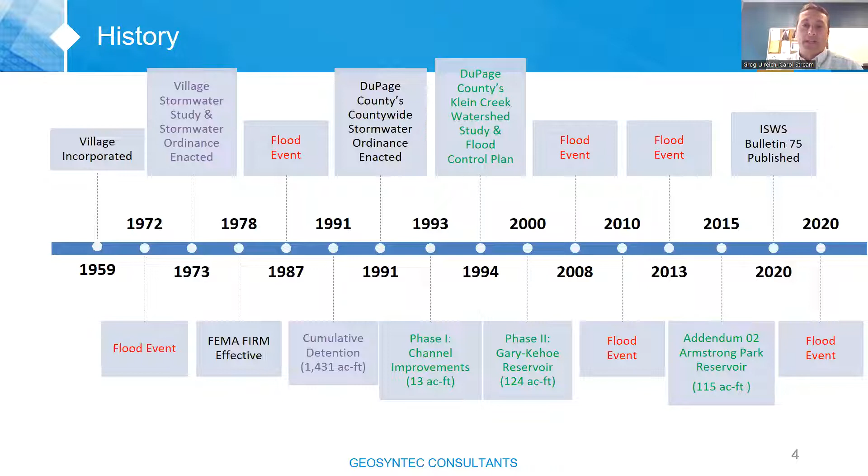And then this May 2020 event is just kind of that flood event there. That's not 100-year. We'll talk about what size that was for us.

So over on the right is the Klein Creek watershed. You've got Stratford Square Mall at the upstream end, that's in Bloomingdale, and then you cross over Army Trail Road, and most of this is Carol Stream, with a little bit of Glendale Heights to the right. So that boxed area is what I have on the screen to the left, and everything is flowing from right to left, with the main stem on the left-hand end.

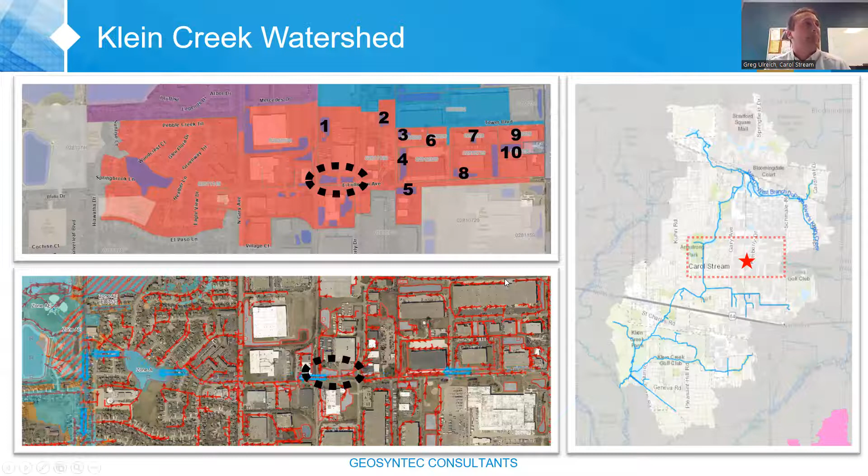The circle is those detention basins as part of the Kimberly North subdivision, which is what we are talking about. When that subdivision was developed, everything upstream of it was pretty much agricultural. Over the years that developed, and we have as many as 10 stormwater management facilities upstream and tributary to these 2 detention basins. So you would think that would help, and that we wouldn't be seeing the issues we see today, but obviously that's not the case.

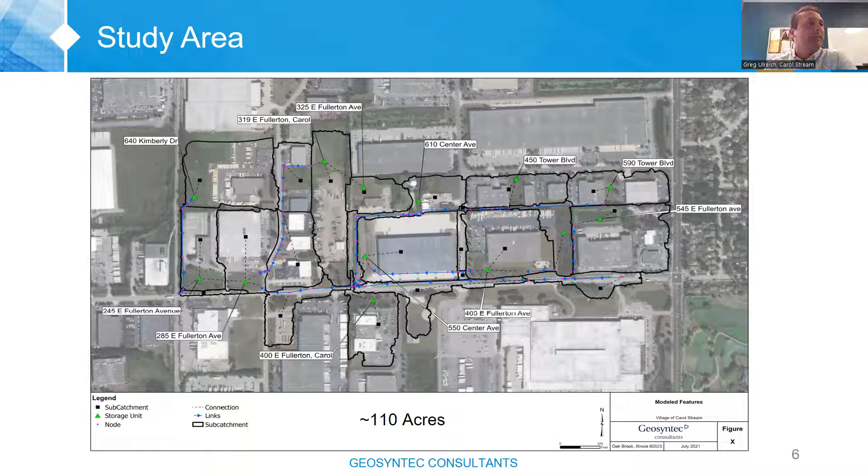So then we used EPA SWMM. I don't know if you paid attention earlier, but the density of the storm sewer network is pretty decent in this area, being urbanized as it is. If you look at the blue lines, we skeletonized that storm sewer system and simplified it to just enough to get the conveyance modeled. But it's also more than just taking the detention basin and dumping it to the next detention basin—we wanted to take a look at what happens in between. The study area is about 110 acres.

Zooming in, the detention basins are kind of split between what I call 2 lobes. They each have their own address because they're privately owned, but they more or less operate in conjunction with each other with a 12-inch equalizer pipe underneath that access driveway. Everything flowing from right to left means the emergency overflow is on the left end and spills over into the railroad tracks. Then the restrictor pipe, which is kind of ironic here, is an 8-inch pipe underneath the railroad tracks, which makes future solutions a little bit more complicated than normal.

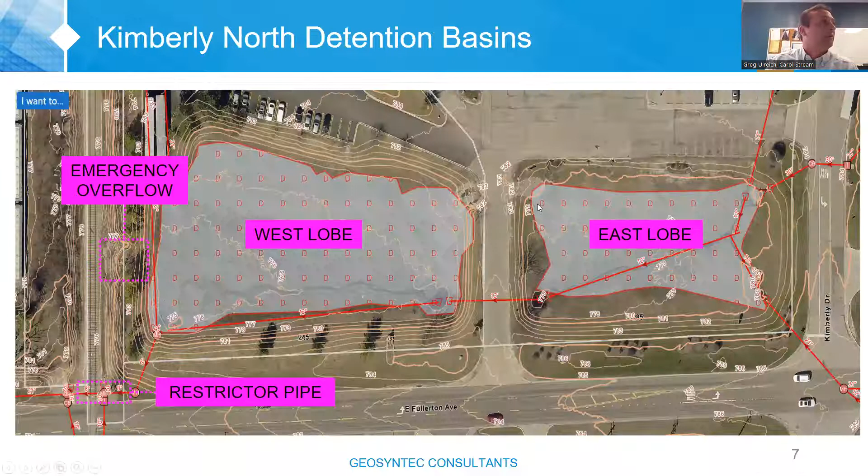So before I move on—looking at those lobes, that's the May 2020 flood event. You can see that the access driveway is flooded, and then in the west lobe in the background there, that's it overtopping the weir.

This is the USGS rain gauge at our water reclamation center, which is fairly close, a couple miles away, so it's something I like to use a lot in my analysis. Over these 5 days, you can see that we got 6.3 inches. If you put that into Bulletin 75, it's about a 10-year storm over 72 hours. If you zoom into the 24-hour period, that comes down to only a 5-year occurrence. But if you zoom in again to that most intense period, about 2 hours where we got just under 3 inches, that's back up to a 10-year storm. So it's only a 10-year recurrence interval.

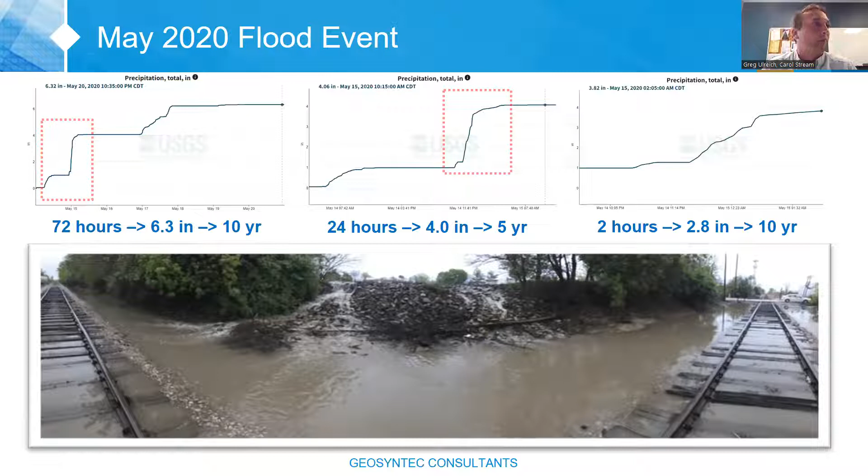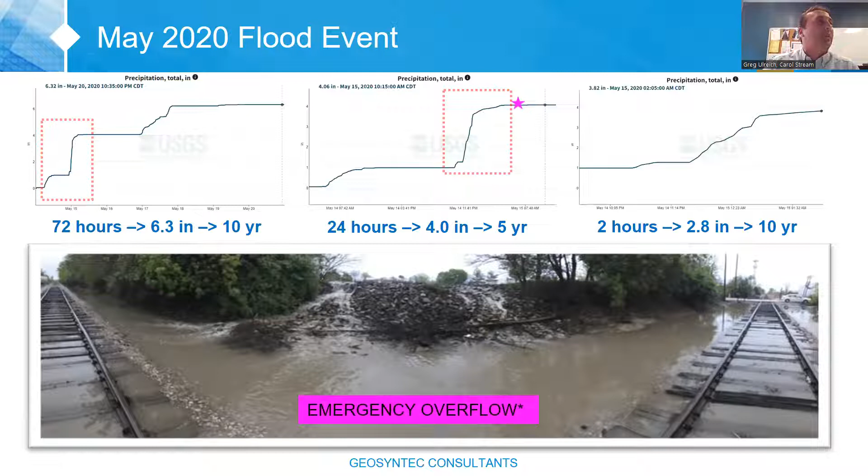So why is this emergency overflow weir overtopping? That's kind of what we're trying to get at with this. That's basically the time of the storm when I took that picture.

Finally, I wanted to touch on an ancillary topic. Several years ago, when I first started with Carol Stream, I knew I was going to be doing some studies, and I wanted to get data on our detention basins and how they operate. So we ended up purchasing just over 24 water level loggers, and have deployed them in a couple locations in Klein Creek, as well as on stormwater detention basins throughout the village.

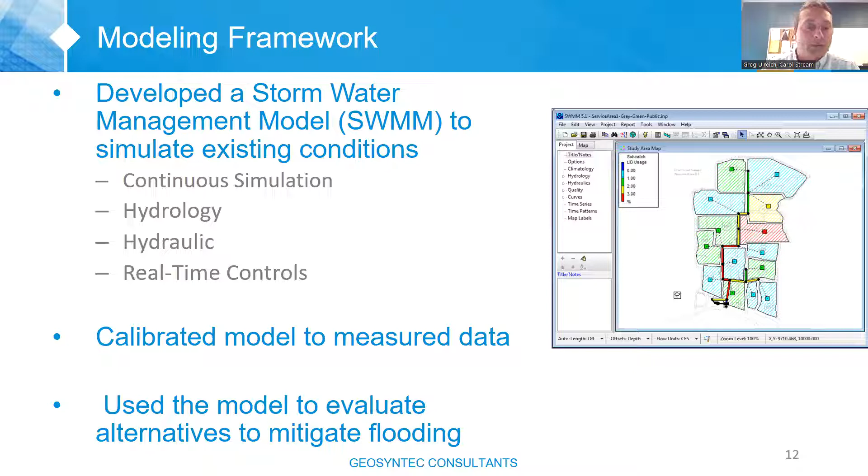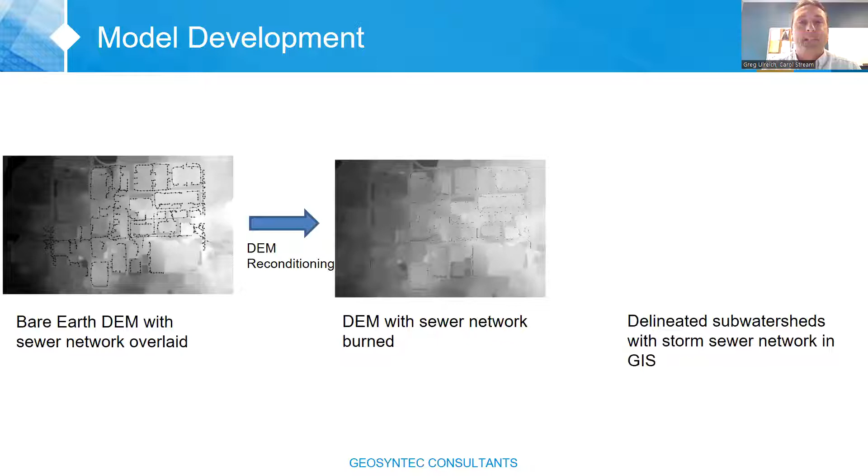So moving on, they used the digital elevation model from that data available from DuPage County's LIDAR efforts, and then they burned in the sewer network so that it dictates where the flow goes. They used that to delineate their subwatersheds. The idea was to set up a process, knowing that this was just a small portion of the Klein Creek watershed, and that we were hopefully going to do more of this throughout.

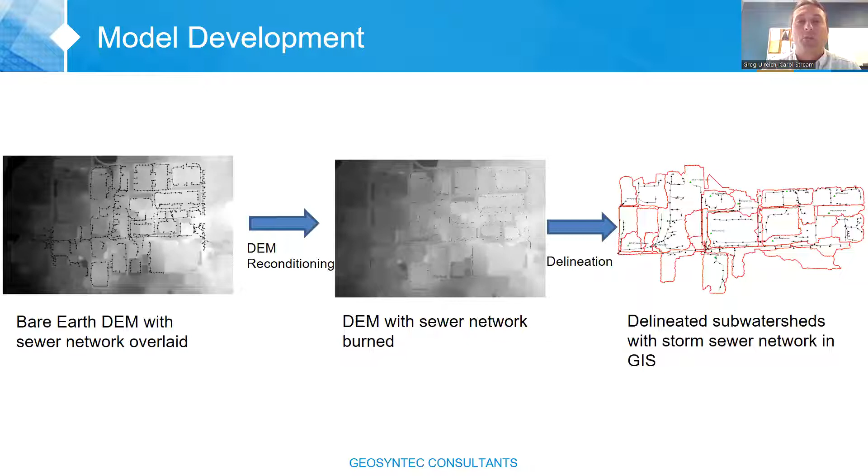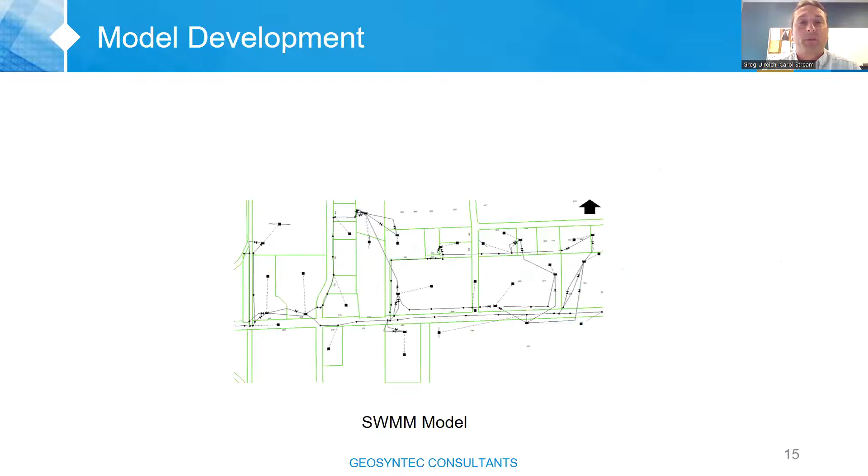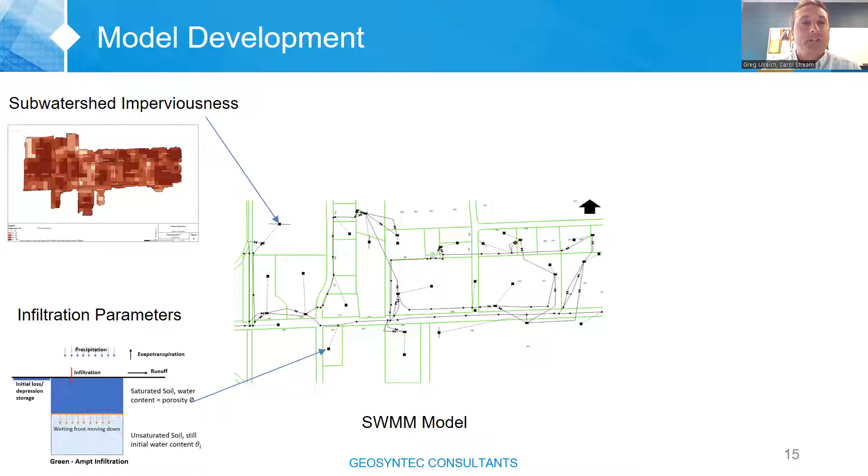So this is the translation of the subwatershed and the sewer network into the SWMM model, and they used some Python coding to do that more efficiently—that's just an open source Python script. The subwatershed impervious area is represented by these subcatchments. They used the Green-Ampt function within the EPA SWMM model for that hydrology aspect.

And then we were able to put in not only the May 2020 storm, but we also looked at the Bulletin 70 and 75 I mentioned earlier—we're still parsing through those conclusions.

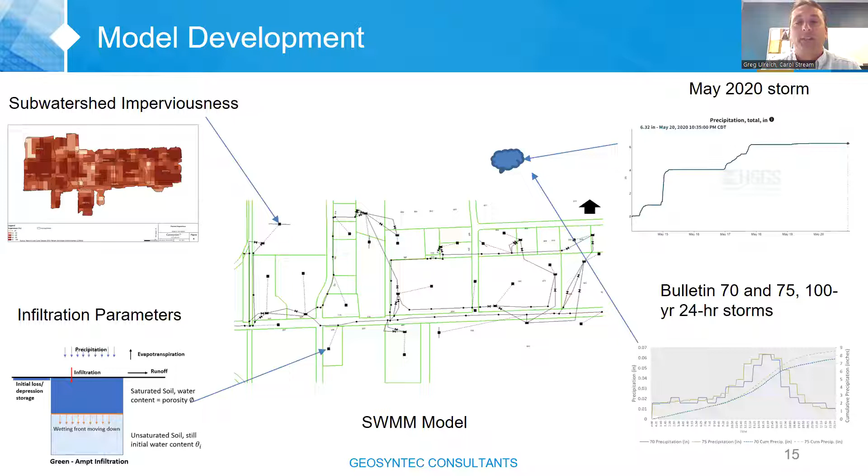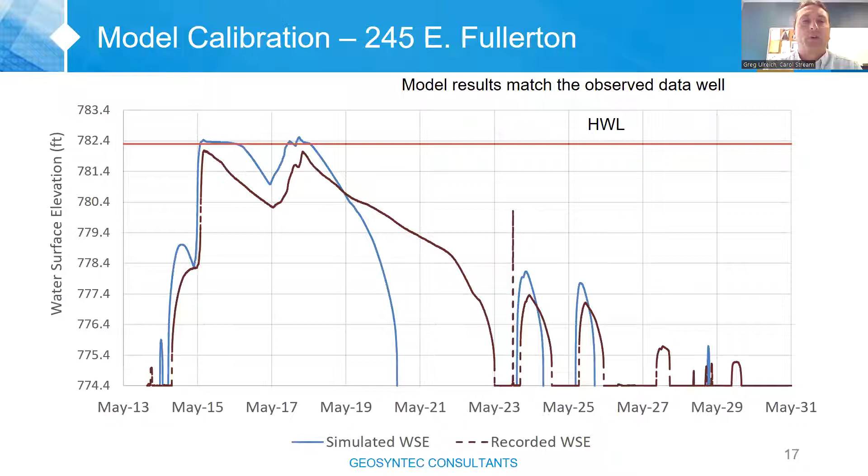So when comparing the model to the water level logger data I showed you earlier, we found that through calibration it models it pretty well, I think. There's a bit of a tail end—the brown is the real life version, so it's draining slower than what the model is saying. I think that has something to do with the operation of that 8-inch pipe underneath the railroad tracks. But in general, I was pretty happy with how that model came out.

So their study is going to look at the traditional solutions. We looked at adding more storage within the watershed, and we looked at potential solutions that might also include a pump station if it's below the outlets.

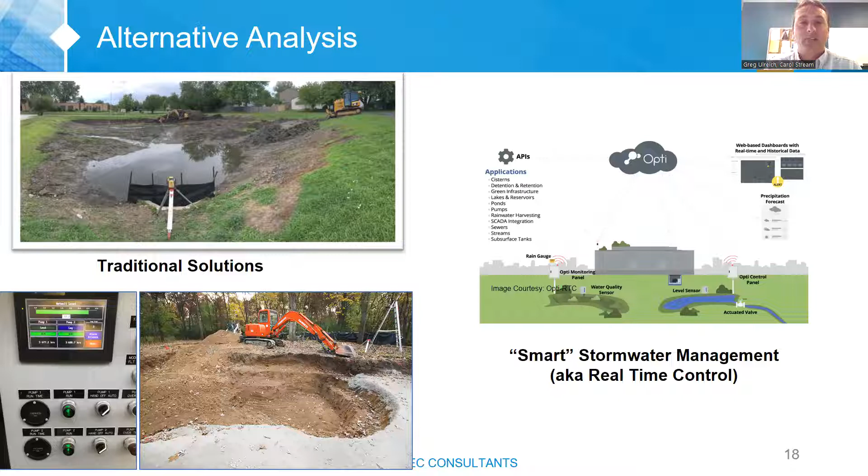But the other thing that EPA SWMM allows us to do is use control rules, and that can look at things like the proprietary Opti system that looks at real-time controls and forecasting, and sensors, and changing the restrictors based on that function. We're not trying to sell Opti—it just happens that, and Rishabh could have talked to this better than I could, Opti was started by somebody who began at Geosyntec and did that as a special project within Geosyntec, then developed it into his own company. So that's kind of why we mention it.

So then this is back to where I wanted to focus specifically on smart stormwater management—to show you what the EPA control rules do, what the May 2020 event looked like, and how it affects the storage utilization.

So when we talk about smart restrictors, I'm basically saying that the restrictor is not just a hole in a plate, it's now a valve that we can open and close, and increase and decrease the flow. That's usually an actuated valve, controlled by a control panel that's communicating with systems in the cloud and machine learning and all the SCADA, and that's also listening to the level sensors.

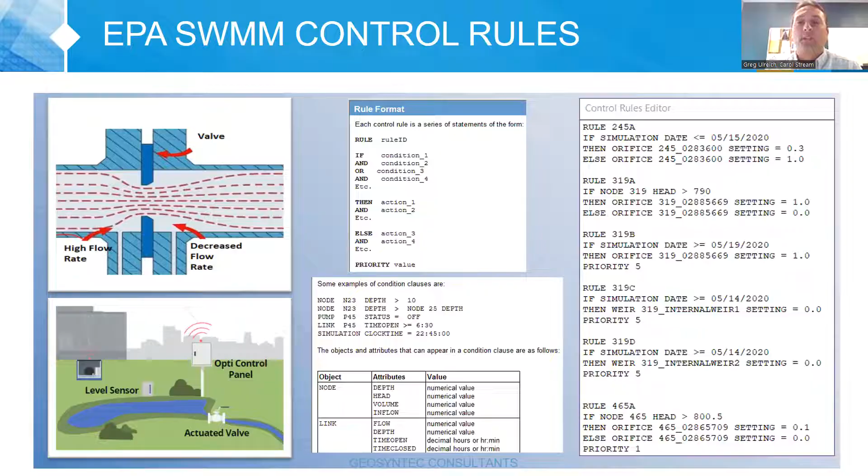Moving on, this is the output for the existing conditions. With this 10-year storm, in the west lobe only, that emergency weir was at 782.30, and the water elevation just got over the top of that. The cyan shows you what that flow is, with the scale on the right. So pretty decent flow over the weir, and that happened not only during that first event, but later on May 17th when that other rainstorm came through.

So what I had the senior design group do was put controls on all 10 of the stormwater management facilities, and it was a pretty basic control. It just said close the restrictor before it rains, and when the rain is done, open the restrictors back up. That's just because we could Monday-morning-quarterback it, knowing what the storm did, so we kept it as simple as that.

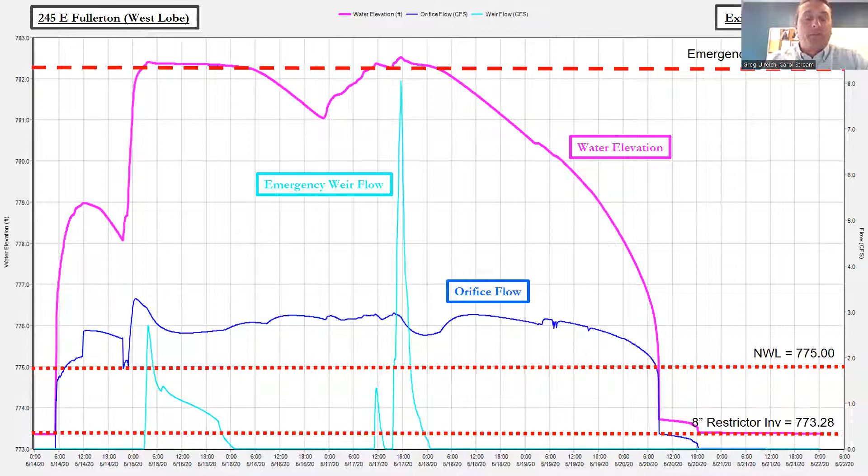You can see that going from having a pond that was full in the existing conditions and didn't quite empty till May 20th, what you now see with controls on all 10 is that it emptied multiple times. That's a significant reduction, and obviously it didn't overtop in any of those bursts of rain that came through.

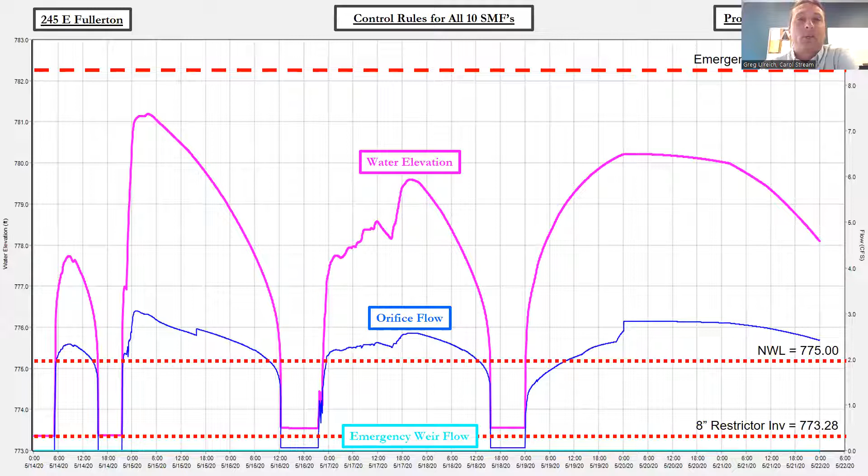So then I had them look at whether we have to do all 10, or can we do this on some of the bigger ones, just a few of those. We said, okay, let's just do it on the 3 largest stormwater management facilities. Once again, very basic real-time controls: keep it closed, then open it when the rain is done. You can see that's not too bad, it obviously kept it from overtopping, which is good, and it drains relatively quickly.

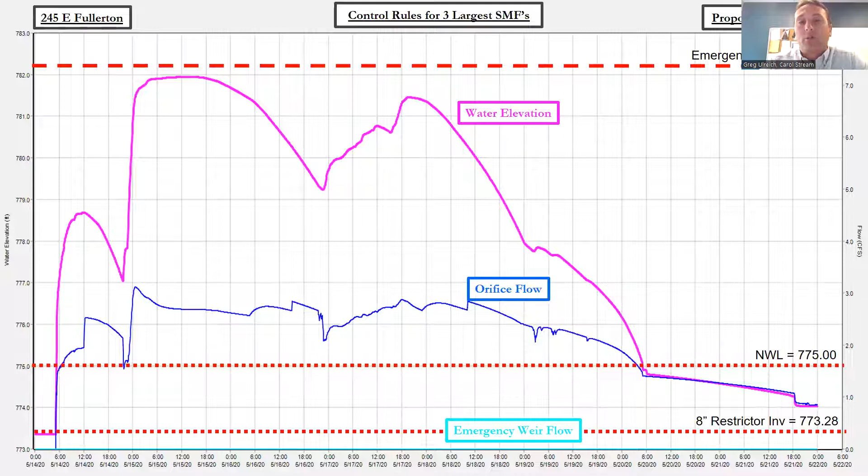So with just 3 of those being controlled in a smarter way, we're utilizing our storage a lot better. This is a focus on storage utilization. This is just a printout from EPA SWMM, and it'll tell you what the max storage was that occurred during the time period you were analyzing.

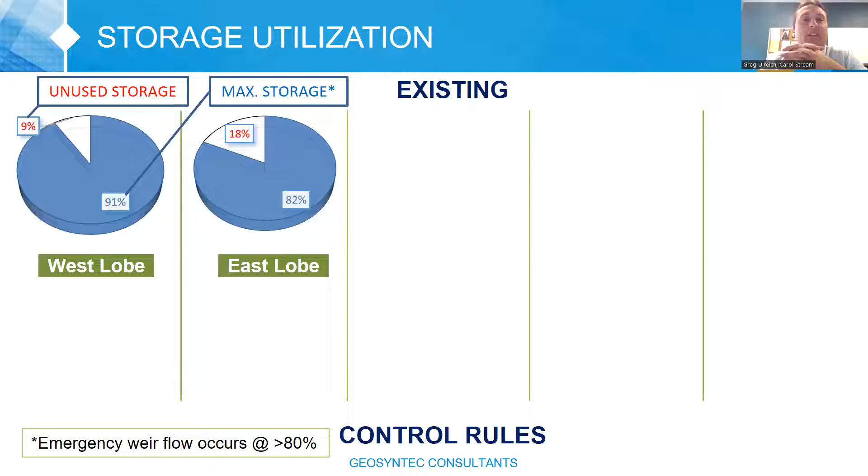It's a little bit misleading because it's going to look at the storage, and if you have an emergency overflow weir, you have to create this dummy storage above it, since when the head is shooting out the emergency weir, you've got something containing that water, and it's including that in the storage total. So what that means is we're actually overtopping when we're at 80% of storage capacity. So when you're at 91% here and 82%, that means the emergency overflow weir is actually active, so it's pretty full, obviously.

So then you look at those 3 large stormwater management facilities that were upstream, and you can see that they're mostly empty. Only 319 was more than half full at any point during that storm event.

So then, looking at when we add those very simple controls, which just say close the restrictor and open it when it's done, you can see that the utilization is flattened and evened out across all the different ponds. You almost double the utilization at that 550 center and the 465, and you're being more efficient with the infrastructure that you have.

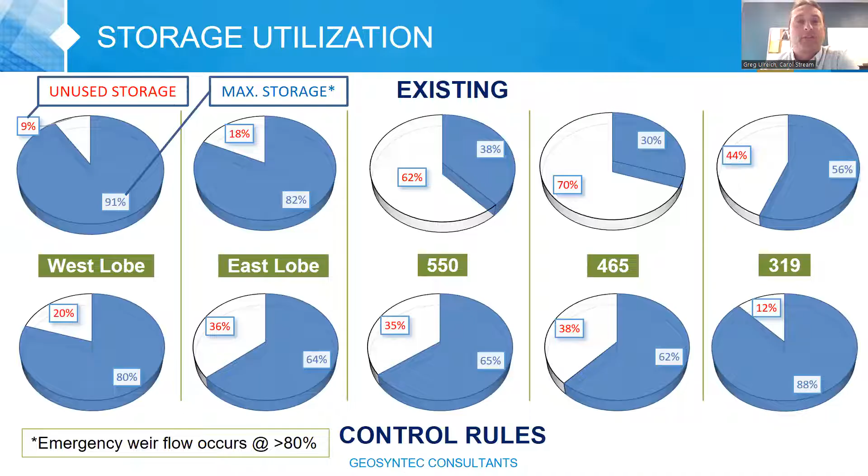So in conclusion, I think someone would find that the control rules are actually fairly easy — it's not too major of a coding effort to do that. Smart stormwater management could have eliminated flooding on that May 2020 event.

So all we did was use existing storage and the same conveyance infrastructure. All we did in theory was retrofit the restrictors. And with that, the utilization rate, by volume, was nearly doubled during that storm event.

It's likely that its maximum effectiveness is going to be these 10 to 25 year recurrence intervals. Obviously that's a guesstimate, but that's my gut feeling. But honestly, that is what people see. And if you're talking about urban stormwater flooding, that's what people see, those more frequent events. When they're frustrated by those and you can resolve them, I think you can make a pretty big impact on people's lives.

So that's not quite DRSCW focused, right? That was more of my basic presentation.

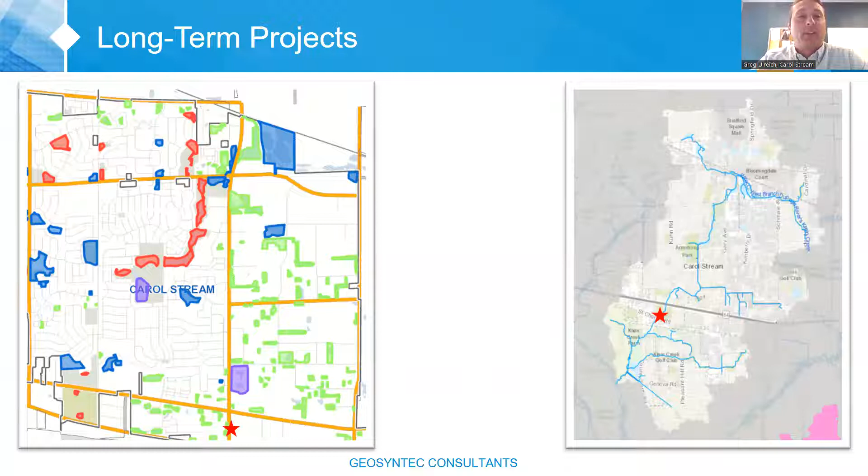I threw in this last slide also to help with that. On the left is a map of all our detention basins that exist in Carol Stream. The green are the private, the red are Carol Stream Park District, blue is the village, and the purple reservoirs are DuPage County's. So there's a lot of opportunity there, if all of these were smart, to take a look at how we can maximize it.

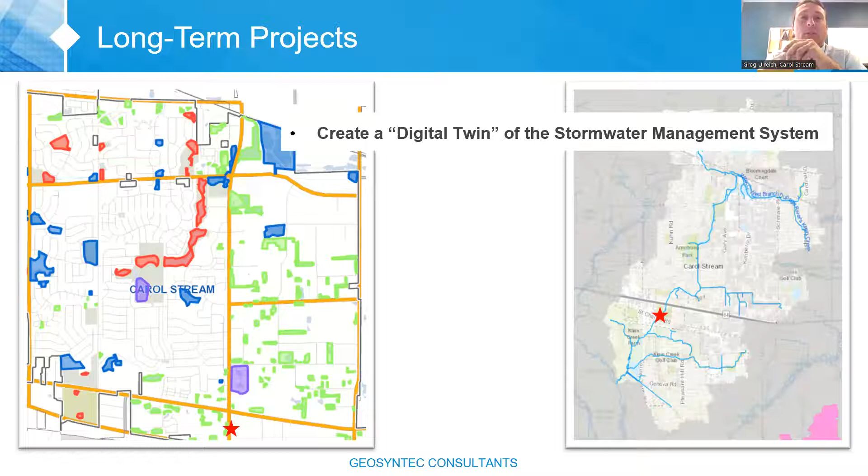So my long-term goal is to create what would currently be called a digital twin of the stormwater management system.

What I'd like to do is look at establishing a single release rate. Each one of these detention ponds is held to the DuPage County ordinance of 0.1 CFS per acre. That's just to say, what is the carrying capacity of Klein Creek, and let's keep each one of those to that rate, so that Klein Creek can maintain its capacity. If we were to do this smart restrictor, that might get violated, and that ordinance rate might get exceeded, depending on how it gets operated.

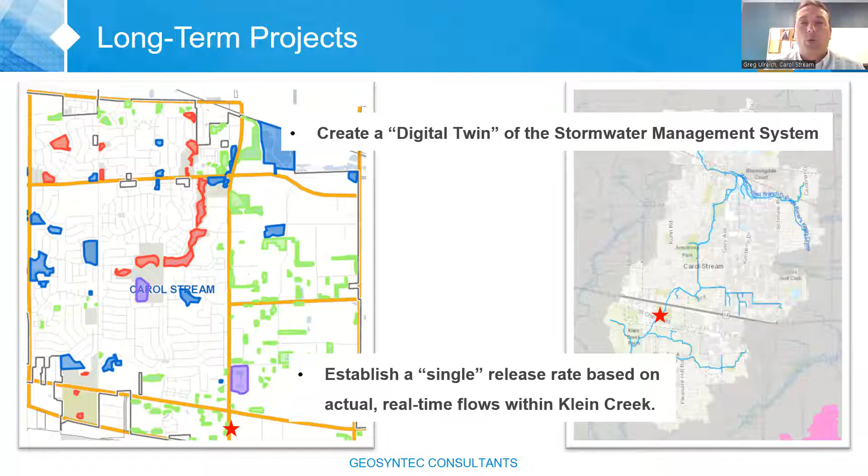So we want to look at, well, at that star, that's when Klein Creek leaves Carol Stream. So could we use that as a single release rate? That's another step. And then the DRSCW-focused part is...

As most of you should be aware, Klein Creek has a stream bank stabilization project that the DRSCW group is funding with some of the project funds, going into construction in August. The idea is we're going to be spending a lot of money on the stream bank stabilization, and the village itself is doing a lot more in addition to just that one project.

The question is, can we also do this hydrologic modification and support the stream bank stabilization we're constructing, and also, in a way, affect aquatic habitat that structural methods may not be able to provide.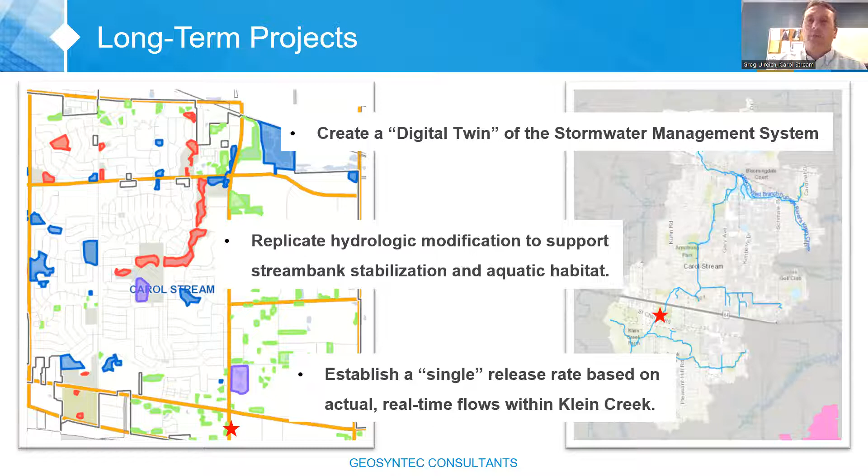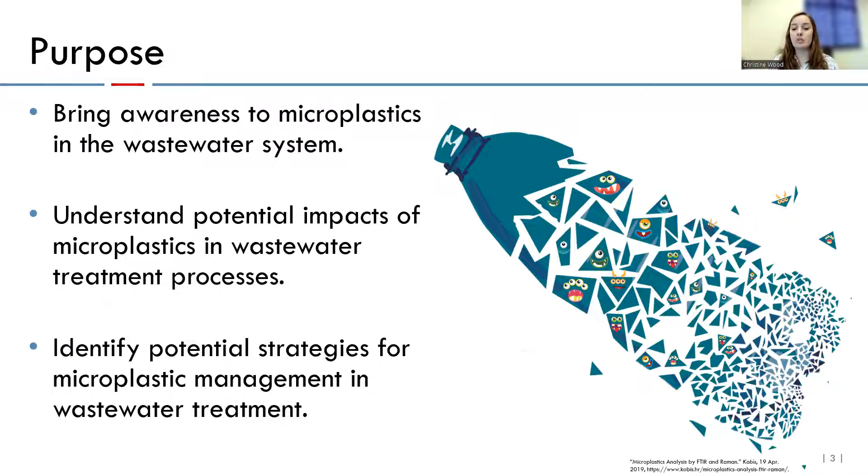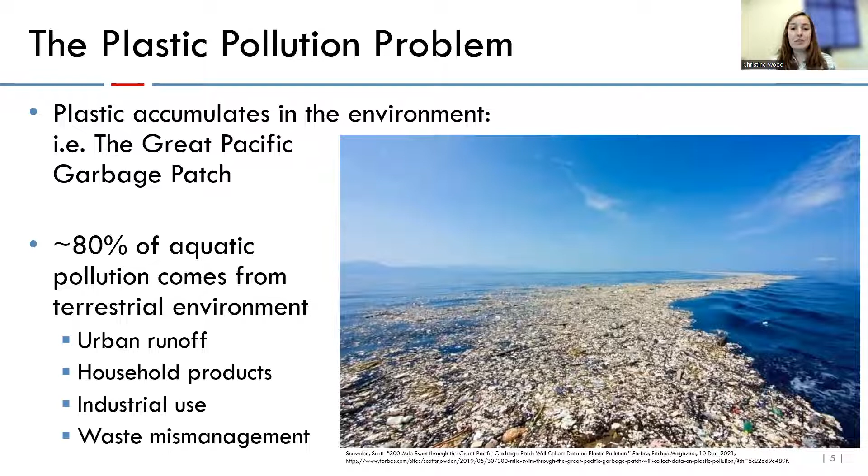Big problem. Of this plastic, 60 to 80% of total marine debris is plastic, and 90% of what is floating is plastic. Overall, around 80% of this plastic comes from land, in the form of urban runoff from roads and structures, household products, municipal wastewater, various industrial cleaners and uses, and even simply littering or ineffective waste management.

Of all the plastic accumulation causing these global concerns, there are three main categories plastics fall into: macro, micro, and nanoplastics. Macroplastics are large-scale, large-size plastic products like bags, bottles, ropes, and netting. Most of our plastics used on a daily basis are macroplastics.

One step smaller, we have microplastics. These are produced smaller as microbeads, or they can be broken-down pieces of a macroplastic—so a piece of a bottle floating around is a microplastic. They can be seen by the human eye at about 5 millimeters; as a reference, that's about the size of my pinky fingernail. So it's small, but you can still see it, and it's not great to look at when it's around our environment.

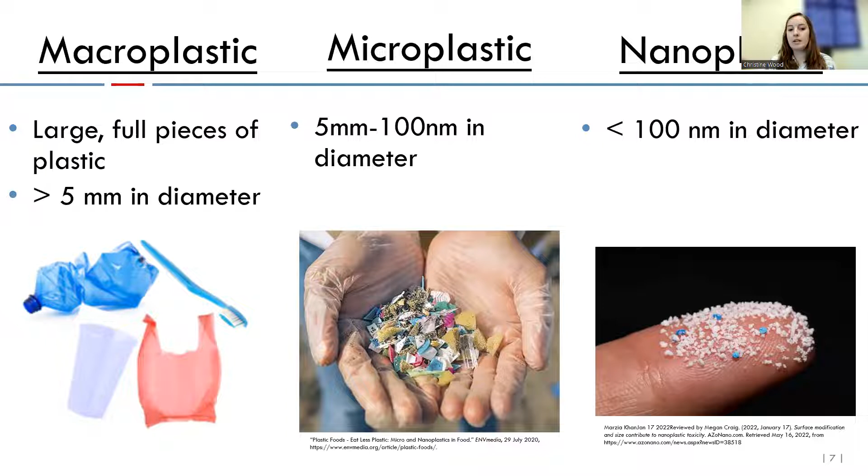Go one step smaller, we have nanoplastics. Typically these require magnification to see, but today's focus is on microplastics, because 90% of the plastics in the aquatic environment are microplastics. So their accumulation is the main contributor to our big picture plastic pollution problem. Even though this monster here might be cute, he is a microplastic monster, and it's the problem we need to bring awareness to in our communities.

So microplastics negatively impact our environment and have potential for human health concerns. Starting with the environment, it's damaging to our ecosystem and our wildlife through getting tangled up in them or ingesting them. It can block digestive tracts or diminish the urge to eat for animals, causing all sorts of issues with that.

Another interesting thing is plastic can contribute to the bioaccumulation of contaminants. They can actually sorb to the surface of our plastics, which I'll get into a little more later. But ultimately, plastic can cause alteration of the ecosystem. There's also some evidence that plastic additives on the surfaces of plastic can be endocrine disruptors, causing issues with repopulation of our wildlife as well.

But for the human side of things, it's not just aesthetically unpleasing to look at when we're on vacation on our beaches, but human health also can be negatively impacted potentially. The World Health Organization, known as WHO, has classified microplastics as not being an immediate threat to humans, which is great. However, there's a severe lack of information available, so it's hard to say if that's really because of the research we have, or we're just not sure what our risk and exposure really is to these microplastics. But because human health is generally a priority for us in research, the focus of microplastics right now lies in drinking water and fish consumption.

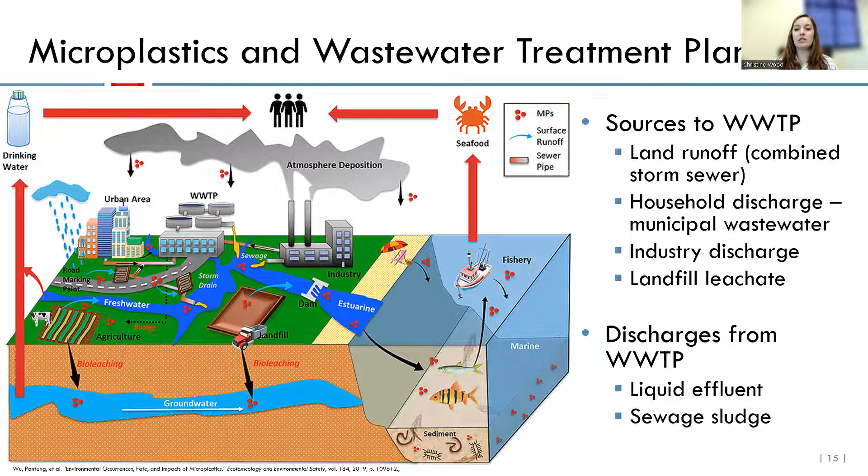So clearly focusing on the reduction of microplastic discharge can assist in the global movement to reduce the aquatic plastic pollution.

But before we look at the removal of microplastics, we need to understand their properties in wastewater treatment plants. There's high variability in sampling and characterization methods across studies, making it difficult to get a good overall picture of microplastics and the influence of treatment plants throughout their unit processes. Every treatment plant can be different, and the studies reflect these variabilities. So the rest of the presentation summarizes what's typical in literature.

Again, every plant's different, so it's hard at this time with the research out there to say this is really what we're dealing with, but it gives a good summary and introduction of what we may see at each different plant.

Of all the different studies, about 30 different types of plastics have been identified in influent wastewaters, and two of the most common are polyethylene and polypropylene. These two types of plastics are used in almost anything you can think of - bags, bottles, bubble wrap, netting, buckets, even construction sheeting, packaging film, or food packaging.

Both of these have high uses in microbeads or micropellets and apparel fibers. When you're washing your clothes, small amounts of fibers get released into your wastewater. These plastics come in a variety of forms, as we saw before. But the pie charts on the right show that in your sludges, you're typically seeing fibers most of the time, and in the liquid side of wastewater, you get a lot of flakes and fragments.

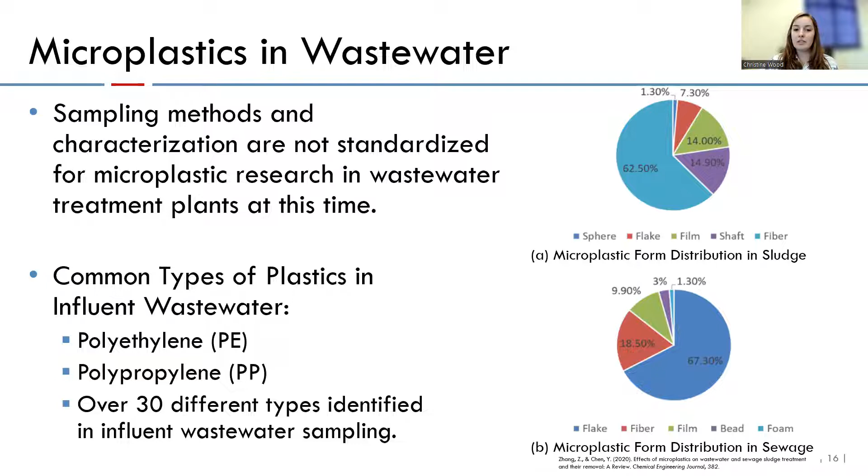So the characteristics of microplastics impact the removal efficiencies. Anything like plastic type, density, texture, shape, and size - really everything except color - seems to have an impact on how well these microplastics are removed by different unit processes at the treatment plant.

But to understand the life of a microplastic throughout the treatment train, it's helpful to know some additional properties. First, they are hydrophobic, meaning they prefer to float or settle in the solids anywhere they can be, not in the bulk water. Even attaching to surfaces of equipment can be seen. But primarily this is an issue because they like to accumulate on floc particles, which for operators can change the settling properties of your floc, decrease treatment efficiency, or make predictive calculations of your settling processes challenging.

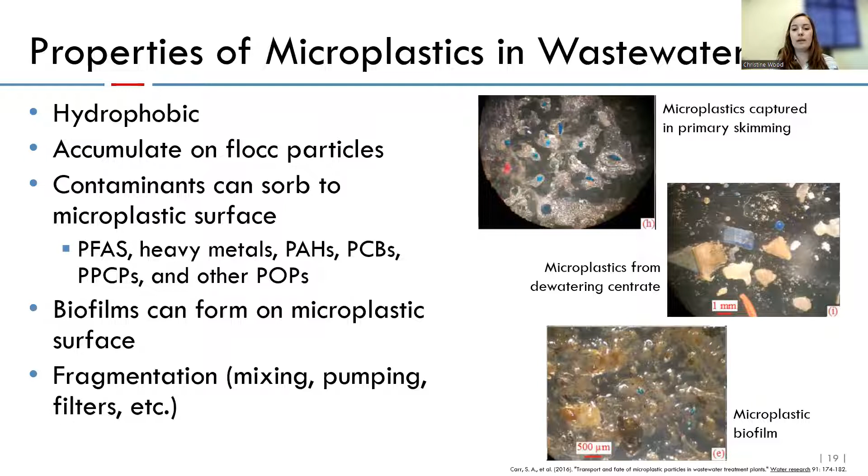Because of this fragmentation, a mass-based mass balance for microplastics seems to be more accurate in characterizing and having a balance of microplastics through the treatment process. So you have your influent amount of microplastics coming in, and those will be removed from your liquid stream and go into your sludge. Ultimately, the amount of plastics in your liquid and solids discharge will equal the amount of the influent. So if we're looking at just plastic pieces, as these break up and fragment through the system, that can make it difficult to accurately describe how much microplastics are being released and introduced.

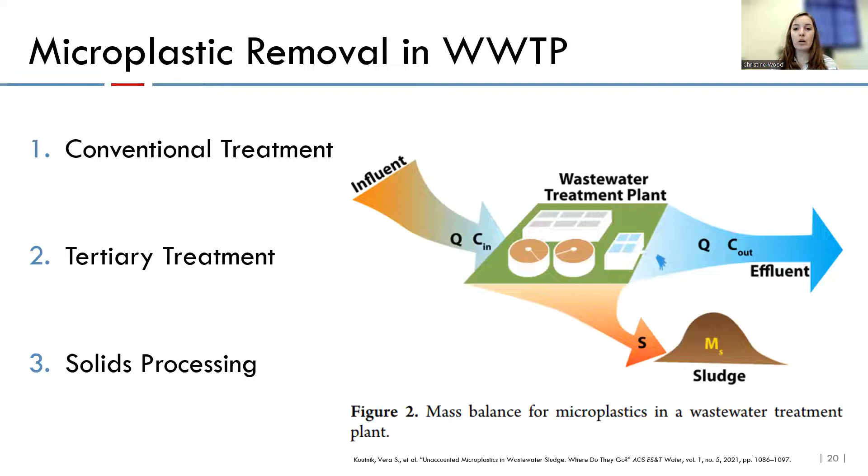So the next thing to look at really is removal of microplastics through wastewater treatment. Conventional treatment and tertiary treatment will remove our microplastics from our liquid stream, and then we'll also look at solids processing.

So let's start with conventional treatment. As I mentioned before, wastewater treatment plants do a great job treating the liquid stream already, but they're not necessarily designed to remove microplastics. Conventional treatment can remove anywhere from 71 to 99% of microplastics, depending on your unit processes, plastic characterization, and different things like that. So typically the removal is around 90% for conventional treatment, and the main mechanism responsible for removal is settling of particles due to the difference in densities between microplastics and wastewater.

So for pre-treatment, looking at our screens and grit removal type processes, more of your larger microplastics are removed here due to those density differences, as well as just getting trapped in other solids that are getting removed in those stages.

If we look at primary and secondary treatment, the biggest mechanism for removal here is density, with our laminar flows through these processes driving the removal and capture of these microplastics either in the sludges or the scums in these unit processes. Disinfection is a little different, especially with processes like UV light. There's shown to be a fragmentation of microplastics, which breaks them up into smaller pieces, but doesn't necessarily provide removal of them.

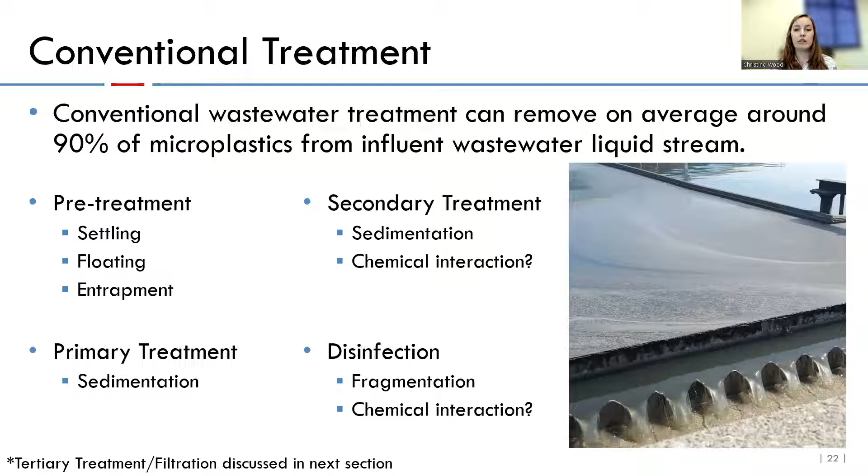One last thing to mention with conventional treatment: you see a little bit less removal of microplastics in secondary treatment compared to primary. That's because the mechanism is pretty much the same - you're removing similar types of microplastics. So by the time the microplastics reach secondary treatment, a lot of those that would have gotten removed in primary have already been removed, and similarly would have gotten removed in secondary as well. So that accounts for the slightly lower percentages there.

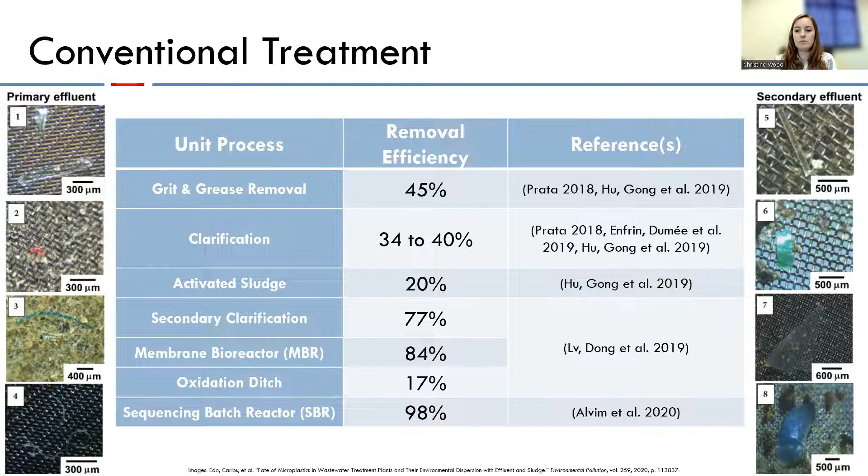So now we can look at advanced stages of treatment through tertiary or filtration treatment. Tertiary treatment is the most reliable in ensuring the removal of microplastics, since these treatment processes are already focused on the removal of generally small or difficult to remove contaminants. Advanced treatment is necessary to remove these small microplastics that weren't removed during conventional treatment processes, but the removal still depends on the pore size and the microplastic properties.

We can see anywhere between 4 and 9% of additional microplastic removal through these processes, but membrane filtration has been shown to be the most effective removal, depending on the pore size of the filter, which directly impacts the removal efficiency of the membrane. Visually, this makes sense. If you think of the pore size and the shape, you can think of this like a sieve. If you know the size of your microplastic and you know the size of your opening in treatment, you can estimate pretty well what's going to get removed.

So this is true for both screen filters or depth filters. Membrane removal is effective and works great. However, it can be pretty costly.

So things like disc filtration and sand filtration are also very effective. Disc filters depend on that pore size. However, there has been some studies showing that a large amount of polymer addition was needed in some cases to make sure those particles actually agglomerated and were able to be removed by the filters. This high polymer addition caused frequent membrane fouling, and there was also some concern with backwash pressure pushing the microplastics through the filter or flexing and damaging the filter.

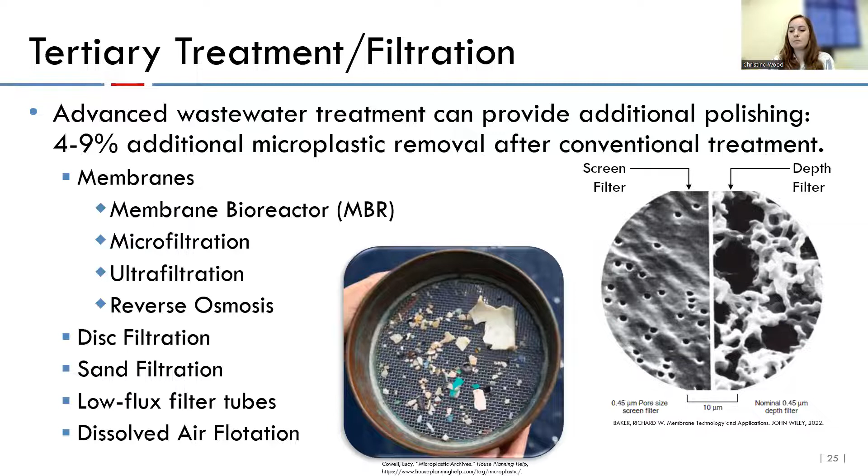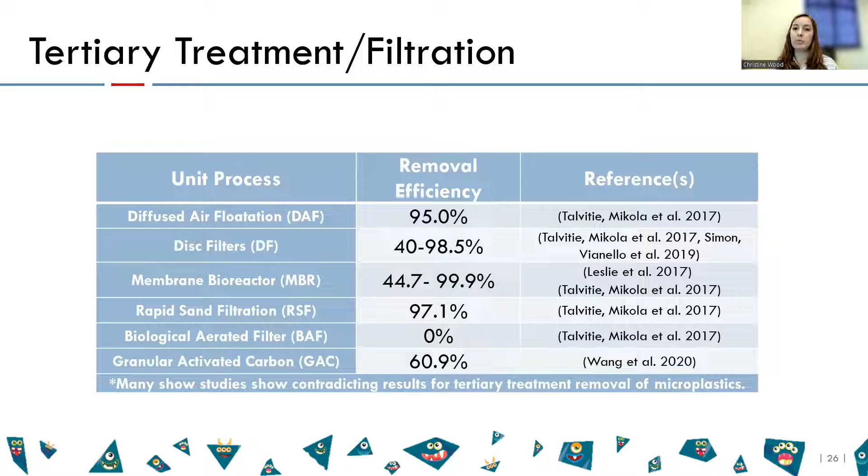And even things like biological aerated filter beds or lagoons sometimes aren't effective in removing microplastics. And so every treatment plant's different. This is a place where pilot studies or more lab identification of microplastics could be really beneficial in understanding the removal of microplastics in these types of unit processes.

So now we've captured our microplastics in our sludges and our scums from primary, secondary, and tertiary treatments. As they're removed from the liquid stream processes, they accumulate in our solid streams, and now we get to address them in our biosolids.

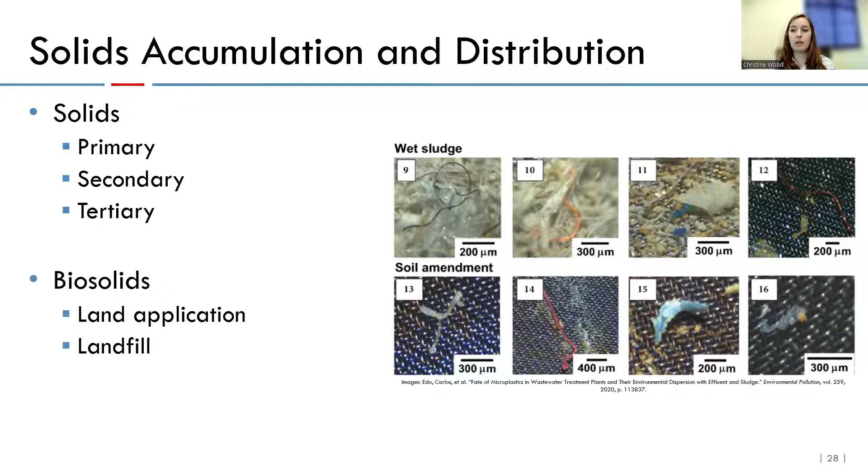So it's been shown that landfilling and land application of our sewage sludges is spreading microplastics throughout the environment. So what can we do about it? Our solids processing techniques that are already happening at treatment plants or in research have shown some promising alterations to microplastics.

The first one I'll mention, though, dewatering, actually has the opposite effect. When you dewater your solids, microplastics that are entrapped in those solids can move back into the liquid stream and be returned back to the head of your plant or wherever that centrate goes to. So it's kind of a reintroduction to the system.

So we're having some modification of the surface of microplastic through these processes, with changes in pH, temperature, mixing, things like that. To me, this is a little concerning given how much research is out there on the adsorption of contaminants to microplastic surfaces. Is this increasing our surface area where we'll get more of that adhesion of those compounds we're worried about? Or is this destruction helpful in the degradation of microplastics in the environment?

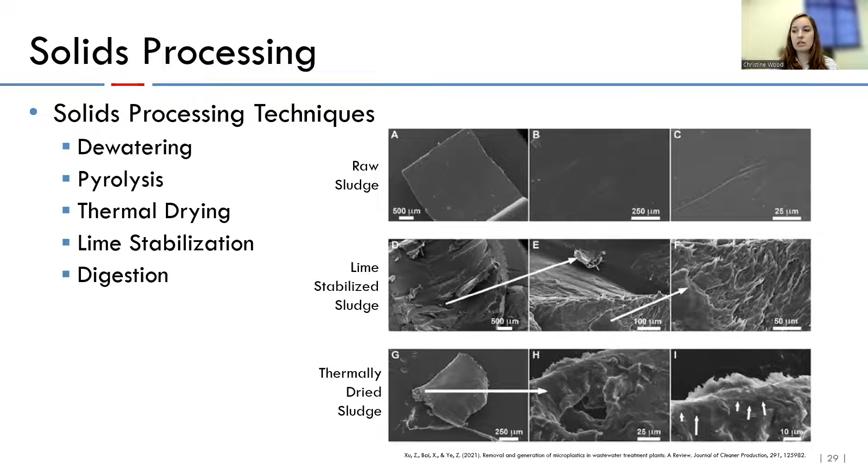This is somewhere where knowing the risk and exposure of microplastics to human and environmental health is going to be helpful in understanding how much and what we need to do in terms of removal and destruction of microplastics. If just going through these existing solids processing techniques is enough to kind of remove that threat, or if complete destruction and removal is going to be necessary for increased environmental health.

So just to wrap up a few things. Conventional treatment is removing, a lot of times we're seeing 90% of removal from the liquid stream, which is awesome. Advanced treatment processes can remove up to 9% more microplastics from the liquid stream. We're then dealing with these in solids processing, and those methods can be destructive to microplastics to a certain extent. More research is definitely needed in treatment removals, and having an understanding in a collective way of analysis and characterization of microplastics in wastewater treatment plants is going to be really beneficial to tackling this problem.

So microplastics are considered a main contributor to the global plastic pollution crisis, and wastewater treatment plants are a critical point source for the release to the environment.

So sounds bad, but this gives wastewater treatment plants an advantage of removing microplastics before they flow into the environment. Increased education and awareness, thinking about the triple bottom line and how these products we're using on a daily basis affect the discharge of microplastics to the environment, as well as impact wastewater treatment plant processes and effectiveness of treatment, can all help our communities move towards focusing on the reduction of microplastic discharge, and treatment plants can assist in that.

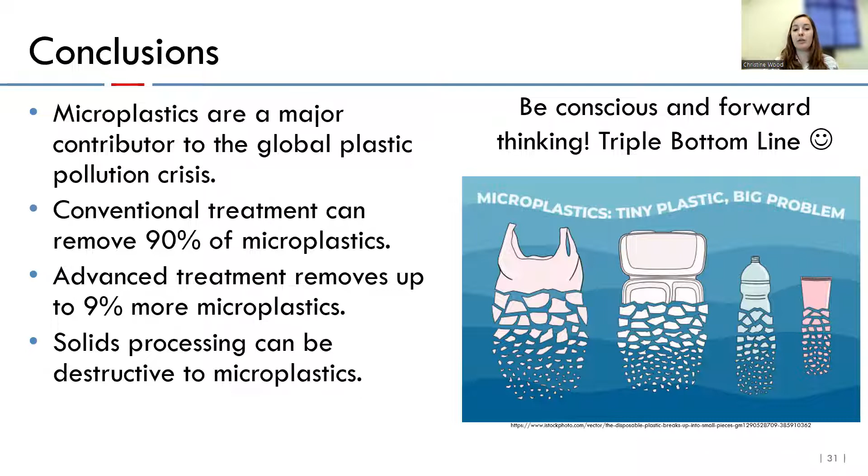So wastewater treatment plants have an opportunity to prevent and minimize our plastic pollution problem from flowing further down the pipeline. So hopefully this was insightful and you're able to learn something, bring awareness to microplastics, and help you start discussions within your communities about the next step for microplastics.

Right now, there aren't any regulations on discharge, but being a point source with wastewater treatment plants, we know that's something we could see in the future. And so microplastics are a problem that we have to work on attacking together in the water industry.

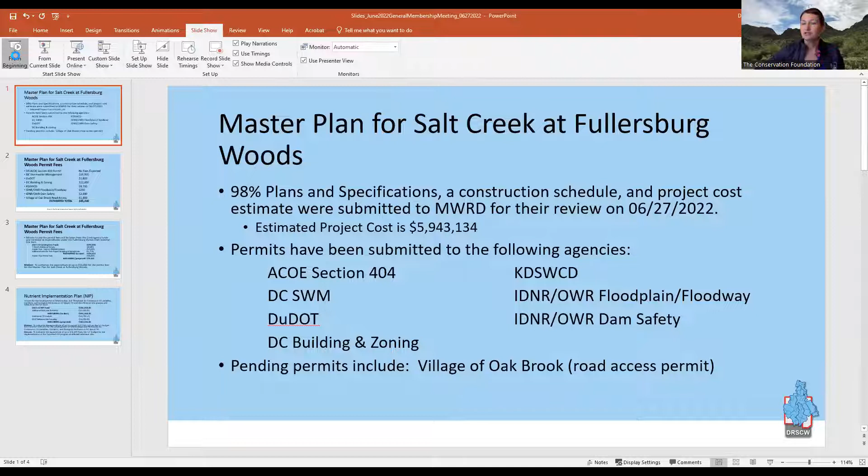As you guys know, with Fullersburg Woods we are in the final design, bid construction, and permitting phase. The final design is pretty much complete, and we're mainly focused right now on all the permit submittals. In the last couple weeks we've submitted those.

As you remember, MWRD is going to serve as the letting agency and general construction manager for this project. They have a crew between their stormwater unit and construction unit that's going to help us get this project out, and they'll also facilitate the on-the-ground construction and data tracking once we go under construction.

As part of their process, we had to submit 98% plans and specifications to them, which also included a construction schedule and a project cost estimate. We got those in earlier this week, so that'll go through the MWRD normal review process.

That review mainly focuses on making sure we meet all the requirements within the volumes of specifications specific to MWRD, as well as reviewing the general construction plans—not for things like whether a riffle needs to be 5 feet longer, but more whether constructability is covered in the plans, and whether they're seeing anything concerning from their experience.

They're not going to go into super critical design questions, since they've been part of that process, but this facilitates their review. Once this review process is complete, the plans can be finalized and put out to bid.

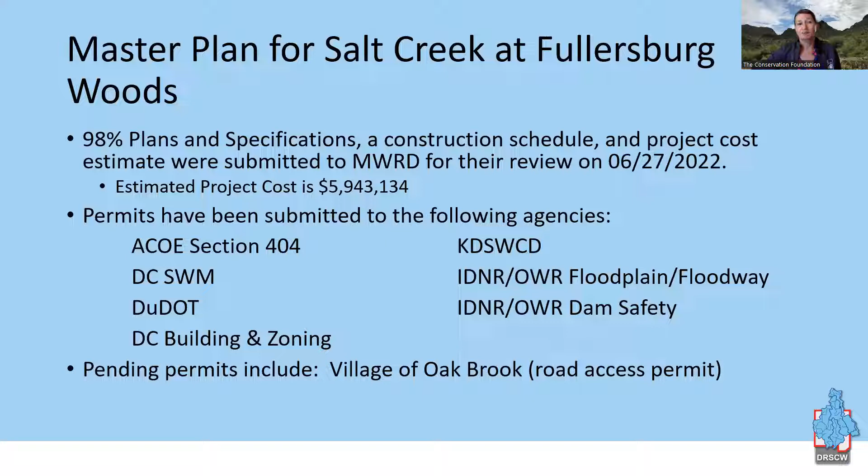So the one thing that comes along with all of these permits are permit review fees and permit fees. These were all very much detailed in the agenda, and this is sort of a summary slide of what these permits are.

So we're not expecting any fees from the Corps. They have not assessed fees to date for any of the 404 or 106 work. DuPage County Stormwater has submitted an invoice for us for their review, and it's right there for $16,920.

Now the next group of permits, I, along with staff from Hay and Associates, have gone through the scheduled fees that are posted on websites or sent to us and made available to us for how you calculate what the review fees are, and I've estimated some of these. So all the ones that are in italics are estimated, and they're also padded a little bit — I added a couple thousand or a couple hundred, because we weren't quite sure how they would take and review certain things. So you can see DUDOT's around 1,800, building and zoning at 12,000.

Kane-DuPage has invoiced us at 9,700. The floodway permit has been completed because they have delegated the review of that to Stormwater. So it was a $230 application fee, and then they delegated it to Stormwater, and Stormwater will be doing that as part of their review.

Dam safety, we're estimating around 2,880. And the Village of Oak Brook, I just said hopefully it's similar to DUDOT. These total 45,330. Some of these numbers are a little different than what was proposed in the agenda.

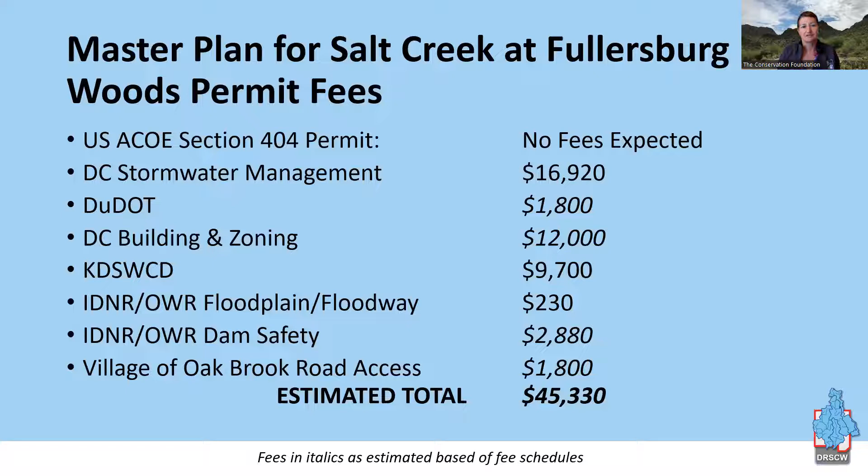It will be updated in the minutes, because DuPage — we had an estimate for you in the original agenda, but then I got the final and it was higher because I didn't calculate something for 2 years, I missed a slight thing in there. So we're looking at 45,330 approximately estimated on those fees.

Now, the way we're looking to help pay for these fees is to be using some money from the contingency funds, and then they'll be recorded as expenditure under the Fullersburg Woods for the fees. So right now, in the budget that we had presented to you guys in February, we had $150,000 in the contingency fee. We've allocated a little bit of that money for other projects right now.

You can see that the East Branch additional survey was 8,640. The master plan, in the last meeting, we had to reallocate $10,000 to some additional indirect wetland analysis. And then, as explained in the agenda that Stephen will talk about next, we had a slight increase of about $1,700 for the Springbrook sampling because of travel costs increasing with gas prices and whatnot.

On MWRD, on MBI side. Sorry, all the M's just come out.

So right now the remaining balance that the board approved, the remaining balance in that contingency fund is $129,641. And we would like to request staff — I know I had around 45,000 on the previous slide, but we want a little bit more buffer.

I talked to Stephen just so that we're not coming back asking the board for a bunch of smaller increases. If we could get approval for up to 50K for the master planning permit fees, that would leave the contingency fund with a little less than $80,000 still in it for other things moving forward.

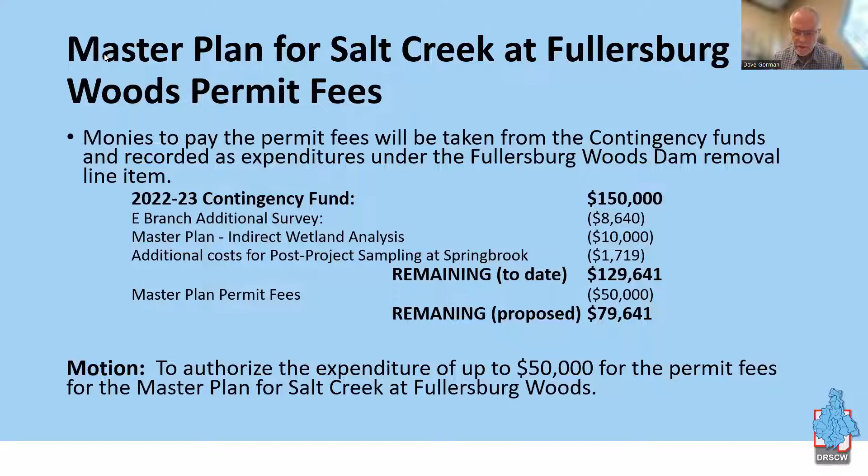Stephen and I had talked about this, so I would put it to the membership to make a motion as stated to authorize up to $50,000 for the permit fees for the master plan of Salt Creek at Fullersburg Woods. The monies will be taken from the contingency funds and recorded as expended under the Fullersburg Woods dam removal line item for the repayment of permit fees. So if we can have a motion to that effect.

I'm seeing a bunch of people. Sue Barrett making the motion and Tom Menard seconding. So thank you, Tom and Sue.

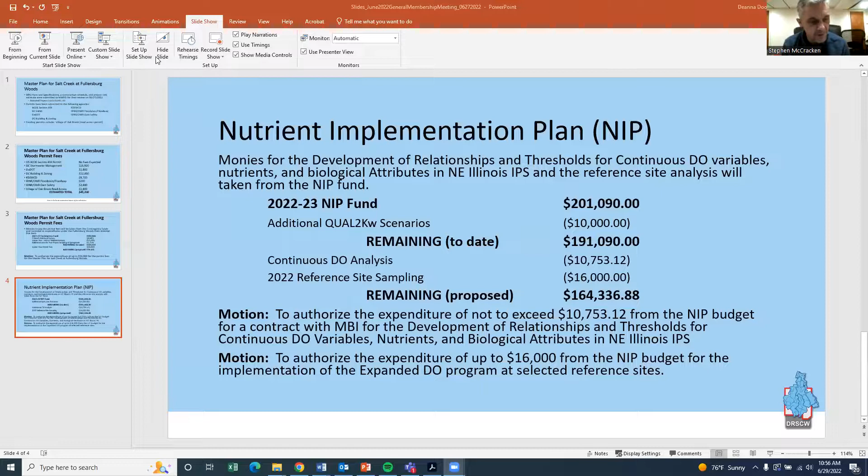And Dina, we can throw up that slide with the costs on it, or rather how we draw it down. This $16,000 would be coming out of our NIP budget. As you can see, we've set it out here. The NIP budget is currently budgeted for year 22 to 23 at $201,090. We've already taken 10,000 out of that, authorized by the board, for the additional qual modeling.

So here we have these two items: the continuous DO analysis, and the 2022 reference site sampling, which is the one I was just talking about—16,000, which, as Dina pointed out, covers both MBI and the chemistry at the site. This would leave $164,336.88 in the NIP budget.

Now, that NIP budget was put together for exactly this kind of item. We foresaw that coming out of our qual modeling, out of the non-point source study, and out of the trading, there could be elements that we'd get to but couldn't have foreseen at the beginning of this process. So it is there to support these processes going forward.

I think staff feels very strongly this continuous DO analysis does need to be done. It is a hole in our current analysis that, the more I look at it, the more I feel is a glaring hole, but it's one that we had previewed having to deal with. I think we're at the point now where we have enough data, supported with this $16,000, that we should get good information out of this, as well as from applying the methodologies we developed under the IPS. So our motion is to authorize the expenditure.

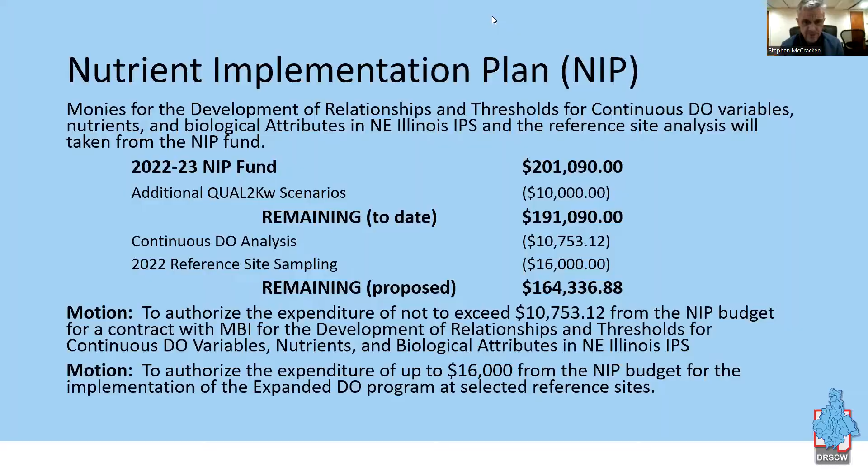Oh, sorry, you want that back? Sorry. Well, I can read it right off. I can't be sharing and do what I need to do.

The first motion is to authorize the expenditure of not to exceed $10,753.12 from the NIP budget to contract with MBI for the development of the relationships and thresholds for the continuous DO variables, nutrients, and biological attributes in the Northeastern Illinois IPS. It's the longest title ever. Yes, doesn't fit into the boxes and tables either. So that is the first motion.

Before we do that, is there any questions, particularly on the reference one—I think that's pretty straightforward—but on this DO study? It has been passed through the projects committee, who gave it a pretty thorough going over, and we did have questions on it. Are there questions out there on exactly what this would do, or the necessity of it? Realize it is a pretty sizable contract, but again, one that we had budgeted for—it just wasn't being called out in the budget because we weren't quite sure exactly what form it was going to take.

Well, let's go ahead and take a motion. And if people have questions about it, please do reach out. Sorry, I did that too fast. No, that's okay. All right, I've got Sue Barrett making the motion and Larry Cox seconding.